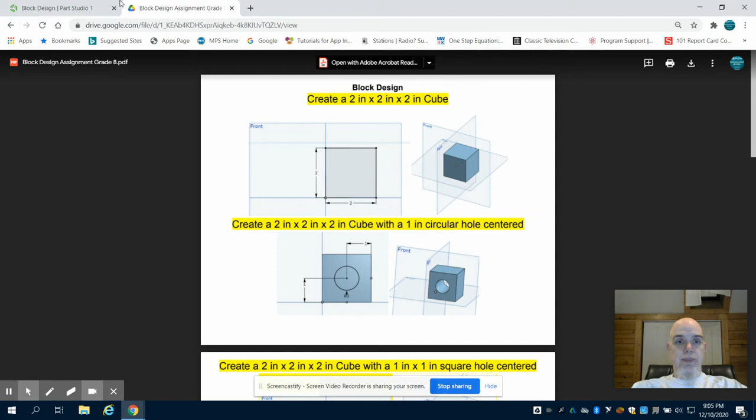My next part is a 2x2x2 plain cube. I'm going to click on my sketch button, choose that front plane, and orientate myself using my navigation cube. Then I'll click on my rectangle tool and draw a 2-inch by 2-inch square.

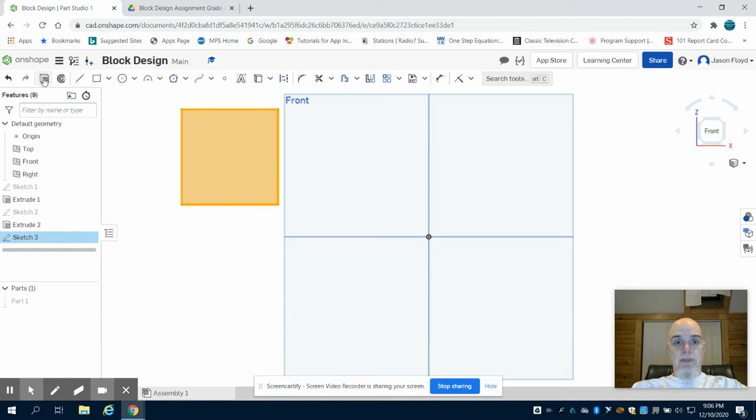Then I'm going to come up to my extrude button and change my depth of my extrusion to 2 inches. I can then look at my navigation bar, and gain perspective to see my 2-inch by 2-inch cube.

A trick I can show you right now is that you can also rename your parts. So I could name this plain cube, and I could right click on part 1 and rename.

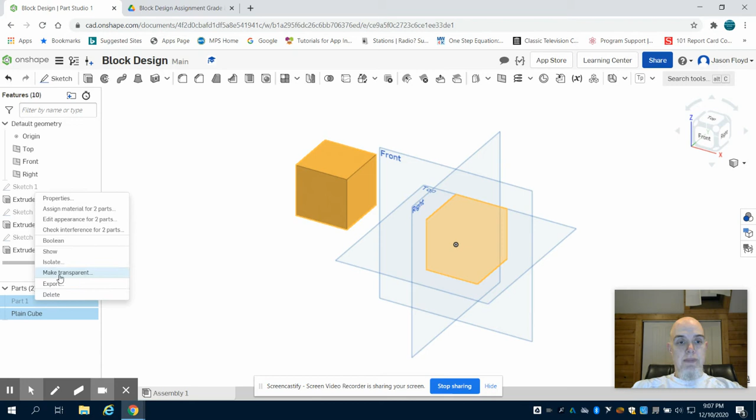Let me unhighlight that cube, re-highlight my first cube, rename it, and call that block with circle hole. That's not a necessity, but it's just a way to kind of keep track of your parts later on for that assembly file.

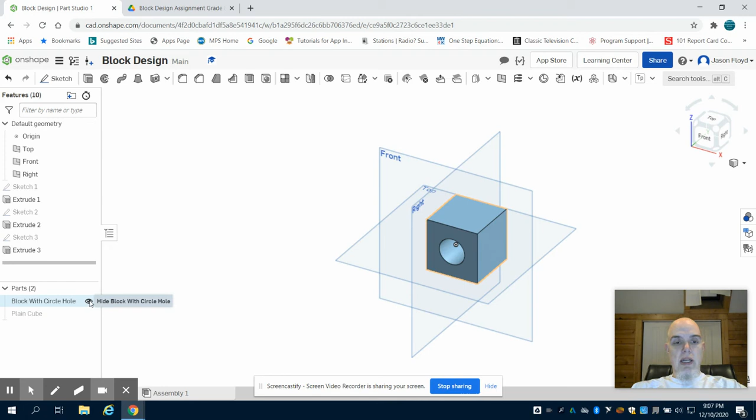So I'm going to hide my parts 1 and 2, my block with a circle hole and my block with a plain cube. The next part we're going to look at is a 2x2x2 cube with a 1x1-inch square hole that goes all the way through it, centered.

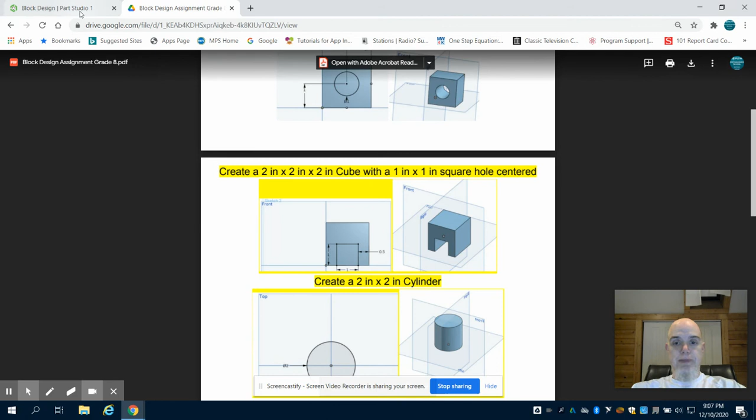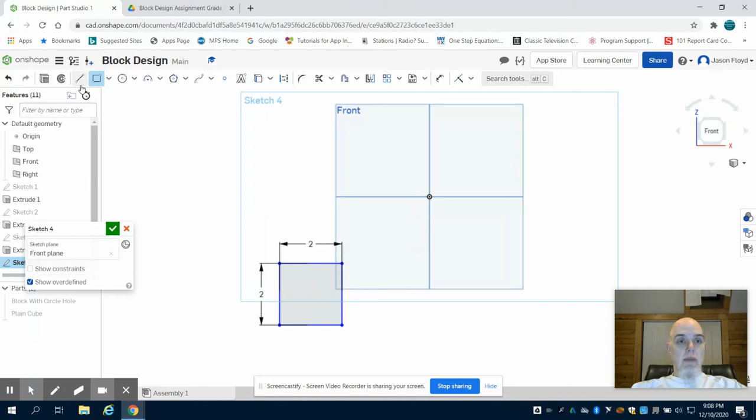I'm going to come back to my sketch, lay a sketch on the front plane, orientate myself by clicking on the navigation cube, grab my rectangle tool, and draw a 2x2 square, 2 inches by 2 inches. Then I'll extrude this part 2 inches.

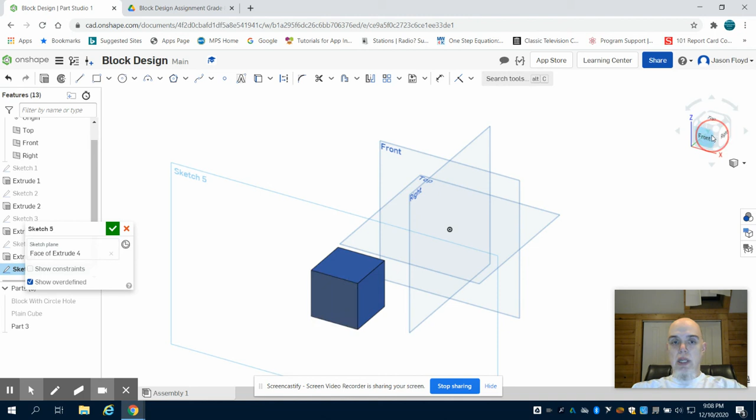I'm going to gain perspective by using my navigation cube. This time I'm going to lay down a sketch on that front face of the cube, not the plane, but the cube. I'll orientate myself and grab my rectangle tool again.

On the bottom line here, I'm going to click and drag out my rectangle and enter 1 inch by 1 inch. I'm going to come up to my dimension button, click on my right line and the outside line of the cube, and dimension it 0.5 inches away, which will center this square.

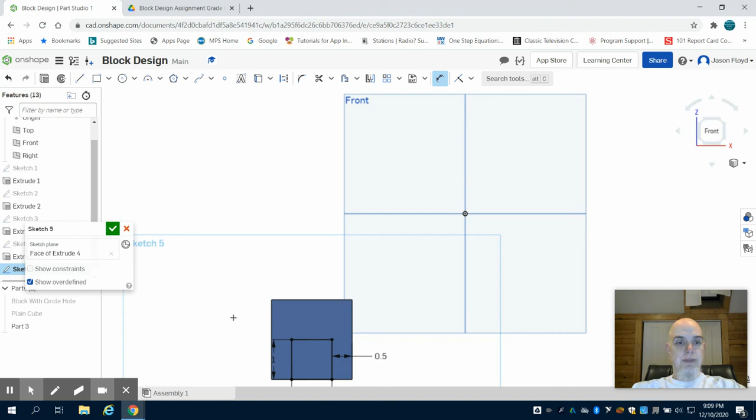I'm then going to click on my extrusion and click into that center region. I can see it's highlighted right there, that face of that sketch 5. I'm going to click on remove, because I want to reverse the direction of this extrusion and remove the material, and type in 2 inches.

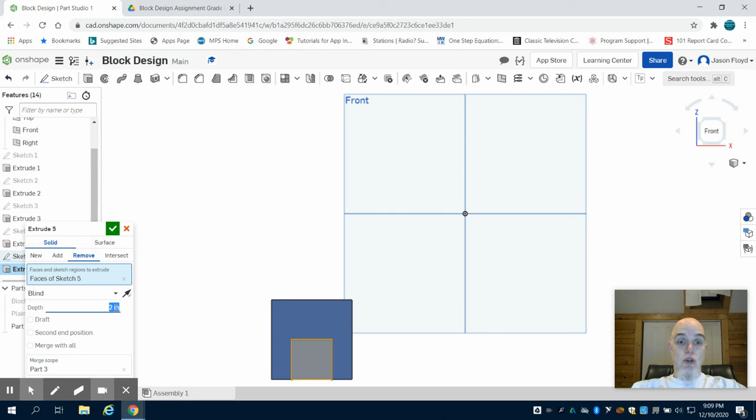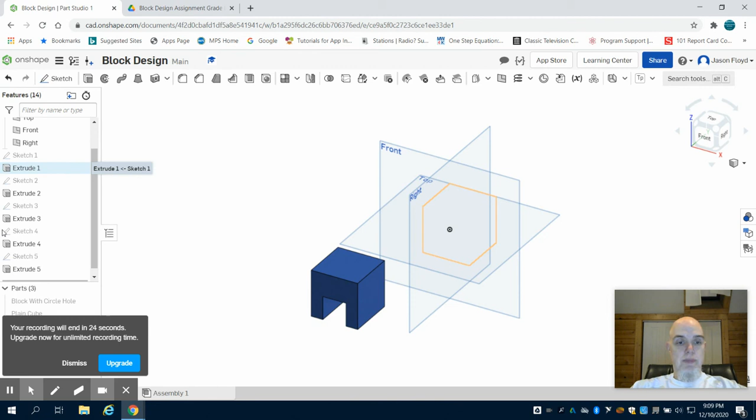If I look at my navigation cube to gain perspective, I now have that 2x2x2 cube with that square hole. I can come over to part 3 here, rename it by right-clicking and then rename, and type in block with square hole. I now have my third part completed.